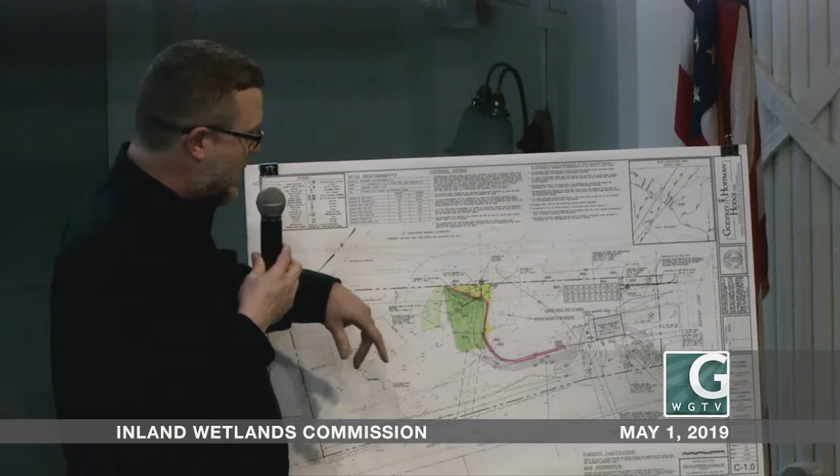So this cleans the water extremely well, captures and contains any sediment or oil within it, prior to any of that water departing our site. From that system, it's going to go into an underground containment system, and then out through the existing storm sewer in East Center Street.

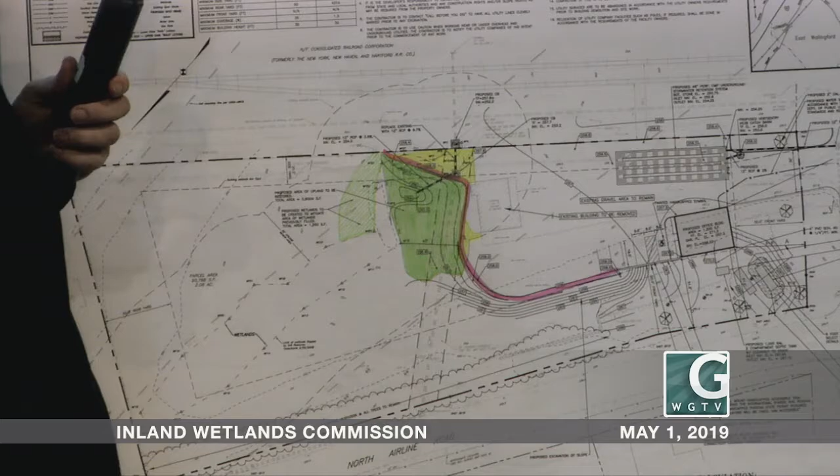So as far as water from our proposed activity that may be collecting sediment or oils, those are being contained and dealt with far away from the wetlands, more than 200 feet away, or 150 feet away from the wetlands. We felt that that would be a better situation if we flow it away from where the wetlands are.

So this pink line designated on my plan here is essentially a berm at the edge of that gravel parking area that will prevent any water, even if there was a lot of water, from flowing up over it and into the wetlands. So we are essentially containing all of this water flowing in that direction, and any water that comes from North Airline Road or overland stays in the existing wetland and in our created wetland area, as well as our upland buffer.

The proposal for the storm drainage and the reconnection of this wetland to the pipe is essentially digging a smaller hole, which is not there now, in that grass area, or the area of straw that you see in the photos we took, making a depression so that the water can get into a pipe and be piped away.

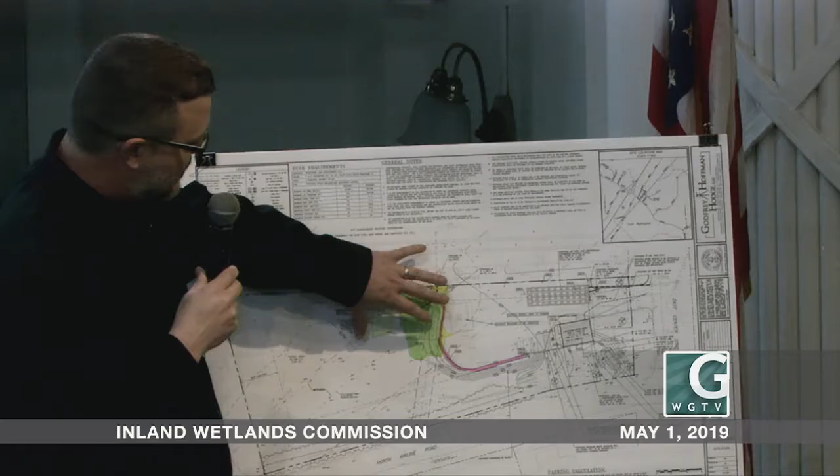But also creating a better situation through plantings and whatnot, which Mr. Lord will get into, so that water which is clean stays clean. The water that comes off North Airline does not go into that wetland, it is piped away. Granted, it goes into the wetland across the street, but it always did. There is no requirement for this owner to clean that water.

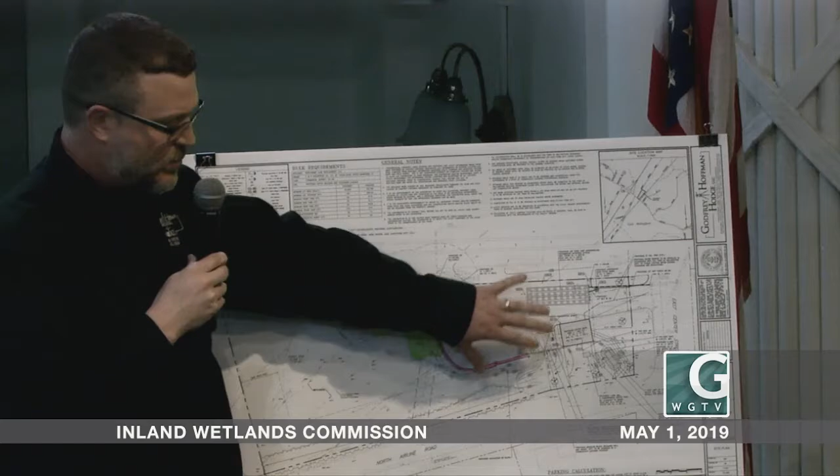We feel that the situation we've created, with a much improved wetland where we create some and a much larger buffer, gives us a 43-foot buffer of new vegetated quality vegetation between the existing wetland and our proposed activity, and that's at the closest point where we would have that activity.

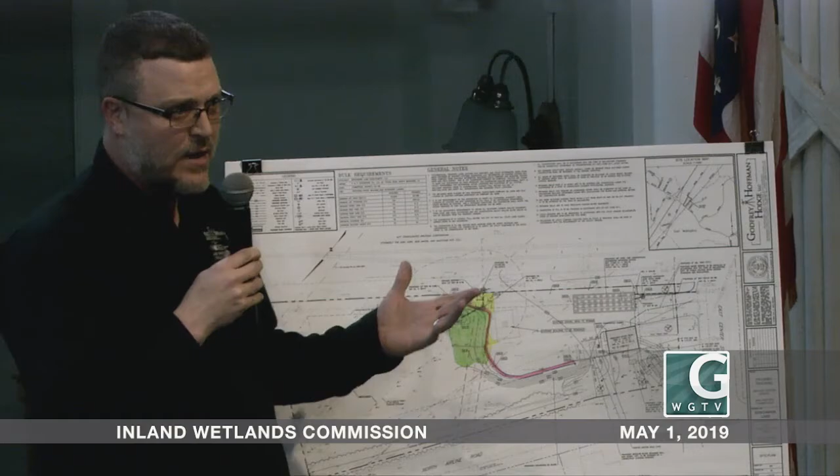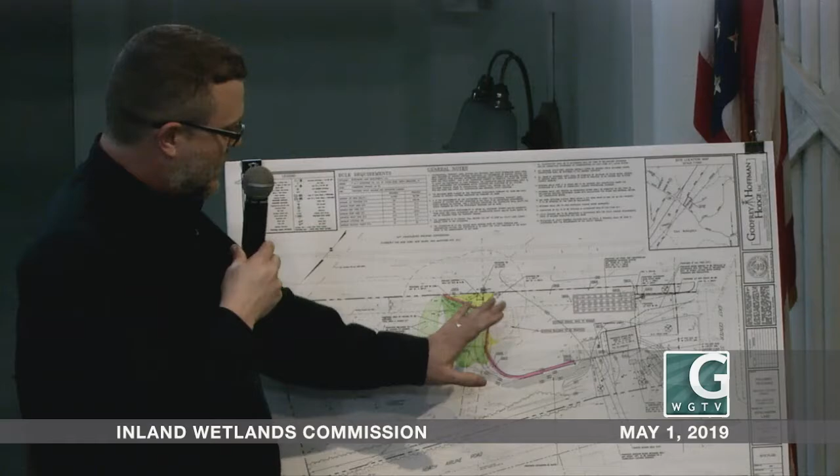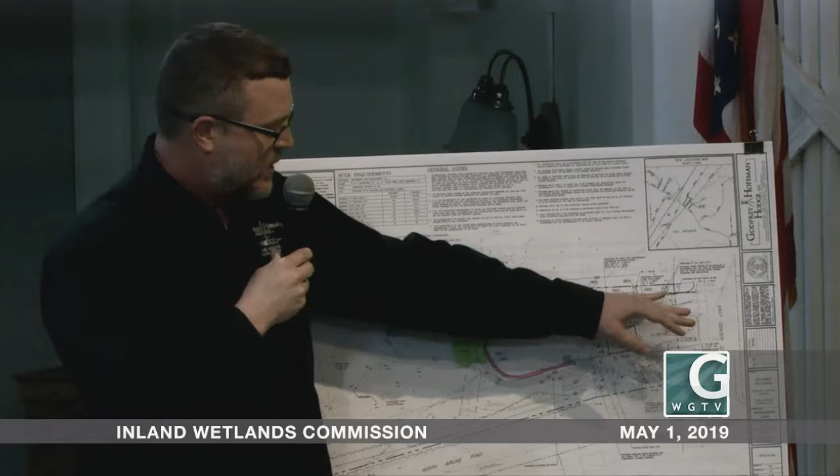That essentially is the plan for the restoration, in large part the same as when we previously proposed it, although we have pulled it substantially away from the wetland from our original proposal. This pulls it up all the way to the back of the existing building, which we propose to remove and construct a new building out front, which would be serviced by city water and a septic system. That essentially is the new proposal. We feel that this is a much better situation than was existing and is currently existing.

Entertain any questions you might have.

You're starving the wetlands. You've just convinced me of that. You've taken the water that was half of the parking lot, that went to the wetlands, and now it's going to East Center Street. You're piping the brook right from Airline Road across and not feeding the wetlands with that water coming off Airline Road. You think you're going to create additional wetlands, but you're not adding any water to that area. I haven't seen anything impressing me that this is feeding the wetlands. This plan is starving the wetlands. When there was an interruption in the pipe, whatever caused it, the water went up into the wetlands, fed the wetlands, and then went back out again.

I don't agree with you. The majority of the water, all of the water you see in that ponding right now, comes from overland. None of it comes from the pipe off of North Airline Road, and why would you want it to? Why would you want the water from North Airline Road in your wetland? Why not? Wetlands can process that water. It's processing it across the street.

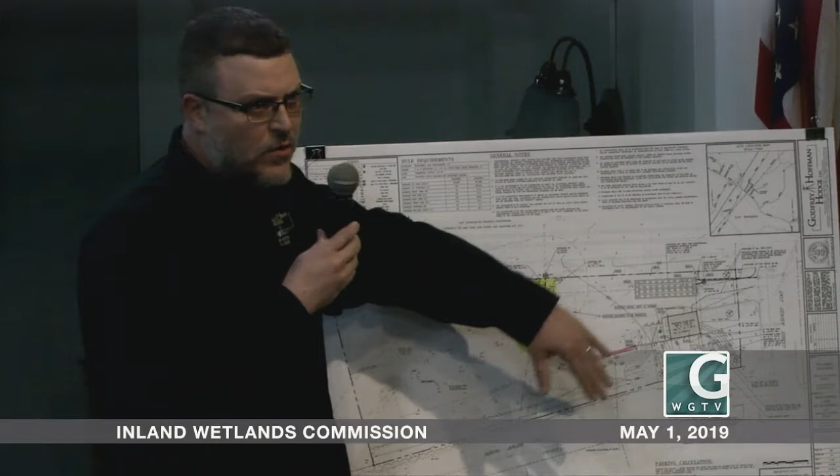So the parking or gravel area is very flat, essentially 2 feet. What's the elevation on the green side? So we're going to go up. I have a 1 foot berm along the edge, and then it drops off also. So in the area along the berm, it goes up 1 foot, comes back down, and then drops all the way down to 254. So it's about a 4 foot depression, a very gradual one down to the inlet of the pipe we propose, which will carry it into the stormwater system. The reason I realigned it and didn't bring it up closer to the property line was to get it more in line with the flow of the actual wetland as it exists, sort of in a north-south direction.

If this is to go further, I'd like to see some type of maintenance program on that water oil separator you want to put in. I don't know if the rest of the commission feels the same way, but if that system is going to be in place, you should have some kind of maintenance program, either yearly or something the engineer would have to design. There is some information in the engineering report on the maintenance of that, and we can certainly provide the commission with more.

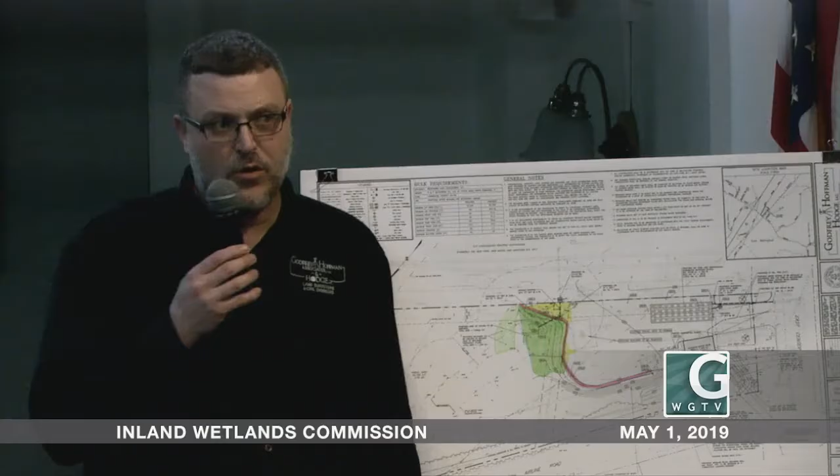Would the access to that field, because of North Airline Road being so steep, where would the access be for the farmer or property owner to mow it? Because it didn't look like an overgrown field, it looks like it's been groomed in past years. It has been groomed in past years, and I don't know whether that is intended to continue or not. We could ask the applicant if he intends to continue mowing it or to allow it to just return to a natural state.

Dave? I'm sorry, no comment at this time. I'm sorry, no comment at this time.

Debbie? Since they haven't complied with our request to remove all that fill yet, I don't see how we can discuss any plans. Fill has been removed, you drove out there yesterday or today, you saw that, and there's pictures that show it's been removed. The only fill that hasn't been removed is where the pipe was open before, which is what Commissioner Kern's been talking about, that's that location.

That's the only location. Dennis, you got a 2 foot elevation change there on the stuff you spread the straw on. There used to be about an 8 foot elevation change there from that mountain of debris. Well, you're heading in the right direction, but you got a few more feet to go.

Based on what elevation? Why would you be basing it on that? It was filled before we went down to where we got to natural soil. Why would you have this 2-foot berm to keep the water back? Why isn't it a gradual slope from the shed that's there now down to the previous grade?

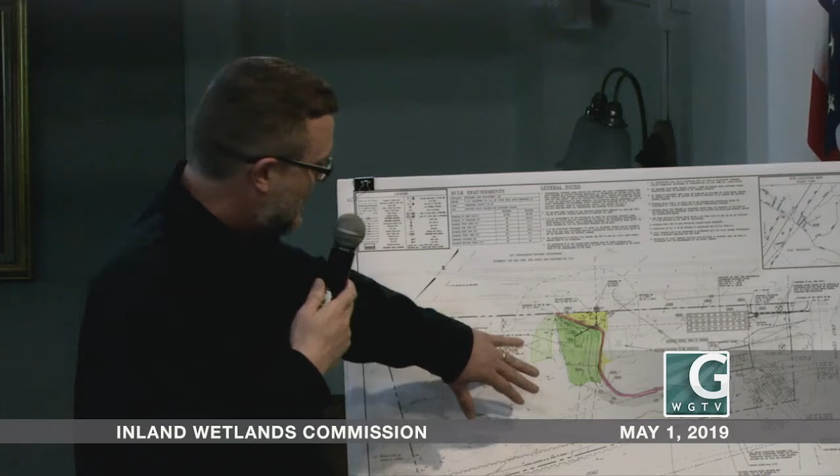Dave, go ahead. Now I do have a question, because this plan, I'm trying to get my head wrapped around it. When we look at the property here, and it's just elevation, whatever it may be, what was the elevation of this particular parcel of land before it was filled?

Commissioner, I can probably give you some insight into that. In 2008, let me just... Well, excuse me, I think it's on your topo map. I think this question is answered on your topo map. Okay.

I think you're down in the 256 category. Right, where did I see the line? 256, 257. And it looks like they're going to give us 254 in their plan. I don't know what their elevation is at their inlet.

My question, just so I get my mind centered: what was it before there was any fill? Was this, and what is it now?

Okay, Commissioner, if I can answer that specifically. David Lord for the applicant. The site was filled at the time I looked at the site in 2008. It had already been filled. It already changed the flow of the wetland that I delineated coming down here, taking the 90-degree bend to the east and then the 90-degree bend to the south. This area, shown on this drawing in shaded color, that's the construction debris that was there in 2008.

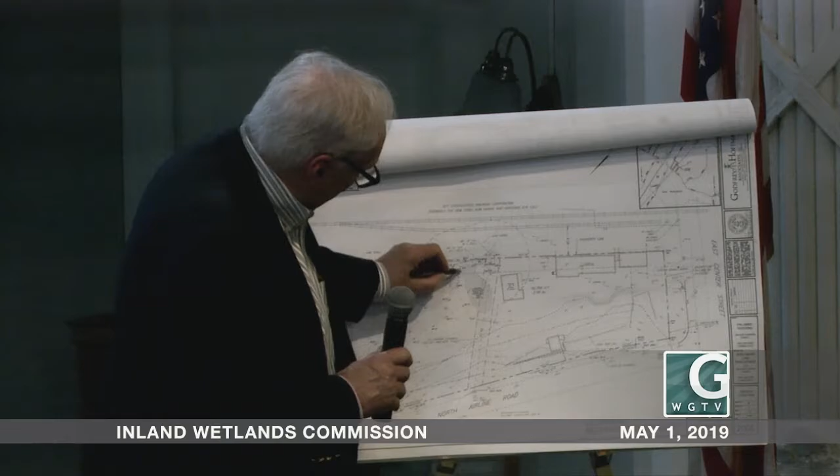The area between my wetland flags and the debris pile was elevated at that point in time. That's why the wetland changed along here, didn't extend all the way to the debris pile, because this area was also filled, likely at the time this redirection of surface flow was done. So there's an area here that was filled at the time I looked at it in 2008.

Then that's what the elevation was. Now, what is the elevation of the property today? What's the elevation of this? Now, of this, because right now we're claiming that we did this remediation. So my very simple question is, what was it before and what is it now?

So you've answered the before portion, and what is it now? The elevation of that area, of that parcel of land, is about 257. And what is it? It's about 257, so with our proposed plan, some of that area is at the grade we propose it to be, and then there is a small area that we propose to grade down further. So you're saying 257 now, and you're saying it was 254 before?

No, prior to... the wetland in that area, this property here, right? It was about 6 feet higher than it is now, before, because there was a big mound of debris. And that mound was taller than me. I don't think the debris plays into this. I think you get the wetlands without the debris, and that's...

Well, that's back prior to 2008. I mean, how do we know what the elevation was? Maybe we're getting a little lost here. How do you know what the elevation was with the debris pile? Because we took topo readings. You've got topos on your map. Are these just lines, or are they accurate? The things we topoed are accurate.

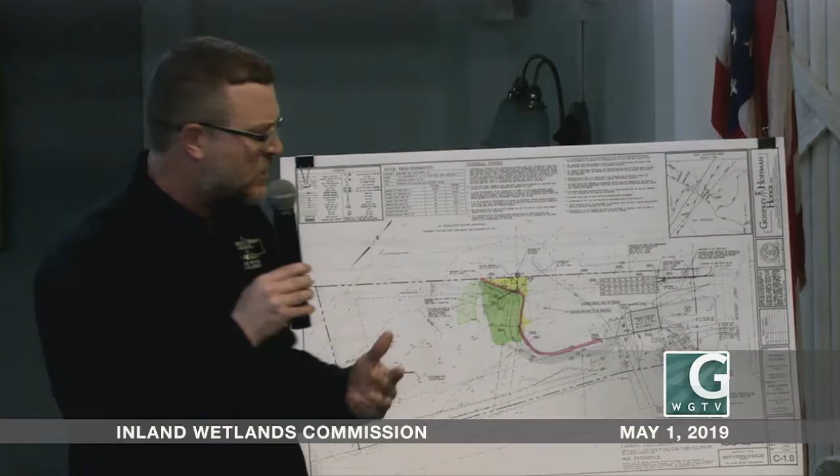So the top of the debris pile was about 261, if my memory serves me, or more. You go from Airline Road: 261, 258, 257, 256, 255, and you're going to create a 254.

All right? Yes. Okay, so that is the kind of area of what the elevation of the wetlands is. Now, you're going to come back with your new berm at 257, so there's a 3-foot slope in a relatively short distance, and you're going to be up where the pipe is going underneath, connecting to the railroad at 258. So you're anywhere from 3 to 4 feet plus difference between the two elevations per your map. Yes, and that's what we're proposing to do.

We didn't do the fill, though. That's the point that's being lost here. We did the gravel.

You told us to remediate our violation. We didn't do the fill—that's what David Lord is telling you, Mr. Chairman. The fill from 2008, you didn't put that in. That's correct, but there's still fill there that you put in. It's gravel. Oh, now it's gravel. It's covered with topsoil and hay on it, is that what it is? No, what was done as a violation still exists out there with topsoil and hay on it. Your pictures show it. That's beautiful remediation, but it doesn't match the existing. What is the remediation? You told us to take out the gravel.

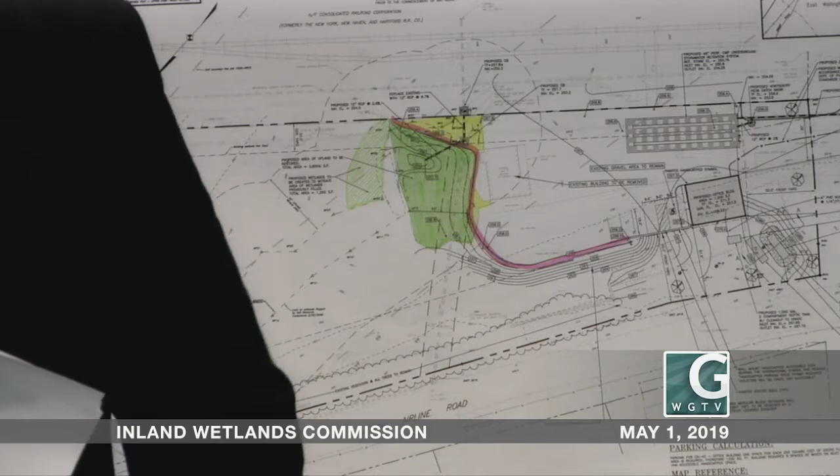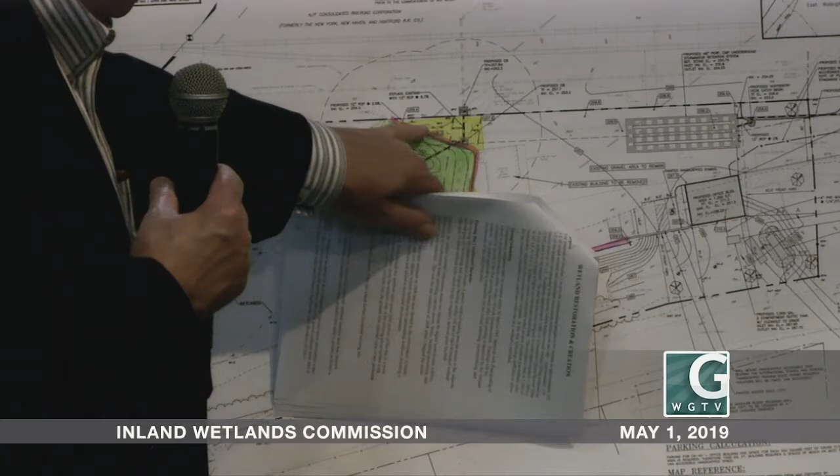Excuse me Dave, flip the previous page back. I think that map can work for you. Sure, that works fine. This area here is where the remediation and restoration of previous wetlands is proposed, same as previous, which reduces the amount of proposed wetland impact remaining down to 347 square feet, in this general area, connecting previously into the railroad property drainage system.

We are at this point proposing to restore 3,800 square feet of upland review area, shown as the dark green shaded area here, to a higher functioning character than what previously existed, both in 2008 and before when it had a gravel surface put on it. So we are significantly improving that area of upland review zone with plantings, seedings, and the establishment of a vegetative barrier between the proposed work area and the upland review area to the wetland.

We have increased the amount of wetland creation that we are proposing. That area is shown in the lighter shade of green. We had a smaller area here in previous iterations of the plan. We now are proposing to create 1,260 square feet of new wetland directly connected to the existing wetland in this portion of the site. That's a mitigation or compensation ratio of approximately 3.7 to 1 - meaning for every square foot of wetland that is to retain the fill on it, we are proposing 3.7 square feet of new wetland of much higher functioning value to the character and functioning of the wetland system in its previous condition.

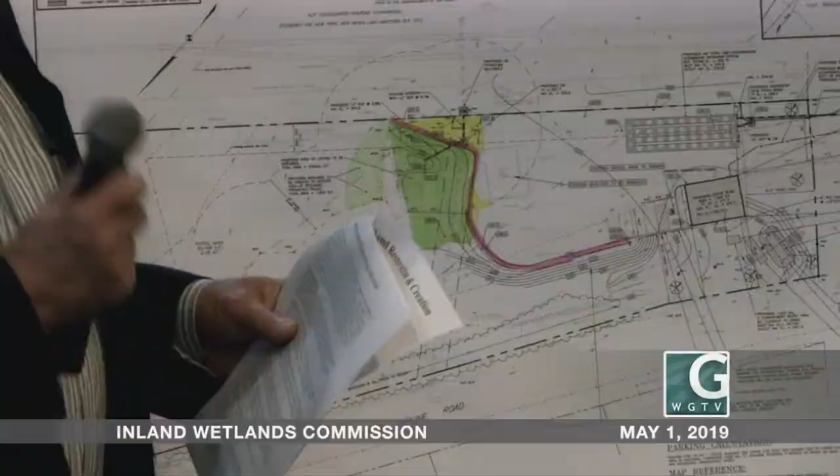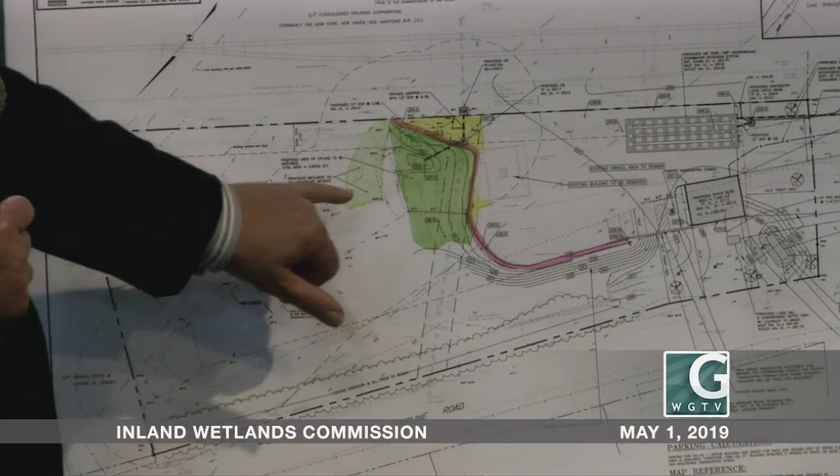That was the elevation existing here on the outside or the inside of the wetland, and that's the elevation we're holding. We are creating a small pool area here at the invert of the proposed pipe, which is at 255, but 254 appears to be, based on soil borings I've conducted in that area, the persistent water table elevation. This area will be fed by localized surface water runoff, conveyance through the wetland system, and the underlying groundwater table conditions.

In general, from a water quality standpoint, the discharge of untreated water is not preferable to the discharge of treated water. This type of structure will cleanse the water as it comes off the site. The discharge of water from the drainage system on North Airline Road into the wetland is not an environmentally beneficial function. It's not something we would propose without some type of catchment, pre-treatment, a man-made structure, or a vegetated zone where Mother Nature could help cleanse the storm water. It's just not something we would normally recommend for handling the stormwater on the site.

On page 2 are those numbers I just mentioned: approximately 900, a little over 900 square feet of new wetland on the site, and a compensation ratio of 3.7 to 1. On page 3, there's a construction sequence.

For the sake of brevity, I won't go into that step by step. If you have questions, feel free to ask. Page 4 begins the revegetation effort within the existing wetland, the restored wetland, the wetland creation area, and the upland review zone area that we are proposing to restore.

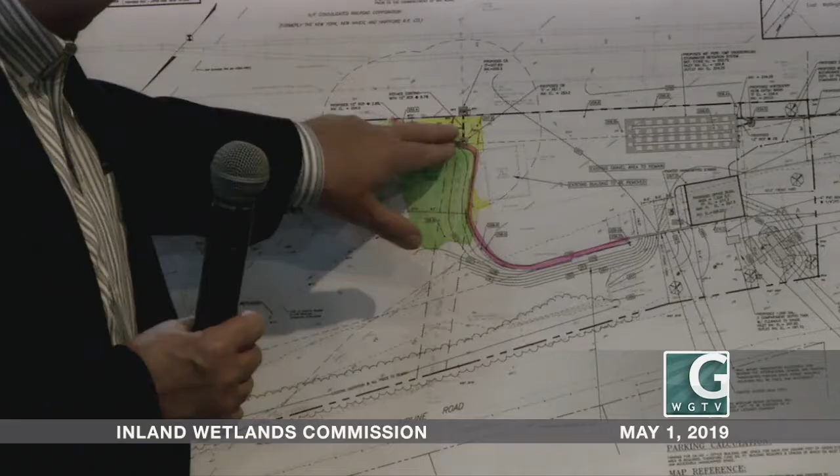It's our best attempt to mitigate and compensate for the small amount of 375 square feet of wetland impact in this area of the site, restoring it to a closer configuration to what it was after the debris pile was removed in 2008. There was a zone of basically flat, higher elevation off of the wetland in the area of flags.

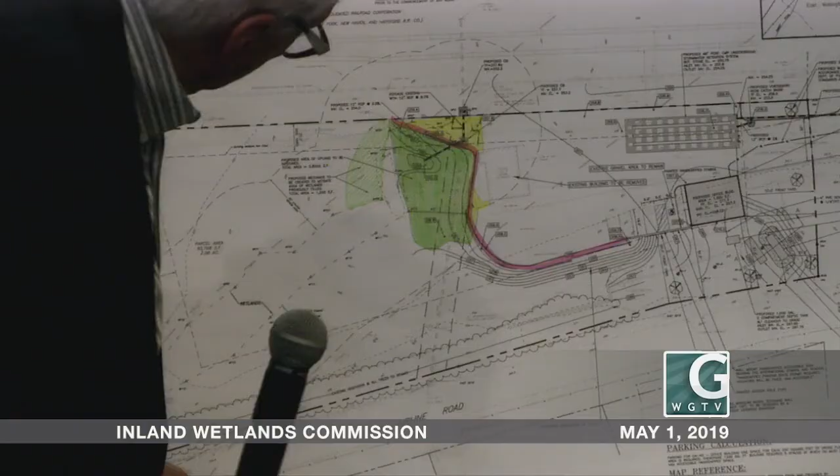There was a step up from the wetland in this area to the upland review zone outside of the wetland before you actually got to the pile of construction debris. There was a surface there at a higher elevation than the wetland, because that's the only way the wetland would have made this kind of turn — there was a higher elevation that deflected the water through that system.

So that's the quick overview of the plan. I'll be happy to try to answer questions that the commission may have.

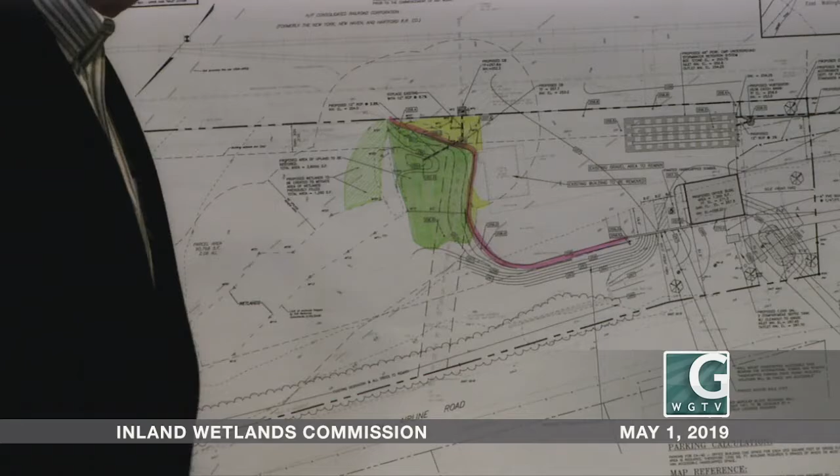I have one. You are creating a new elevation with the pink line. Yes. And the distance between the pink line and the wetland is 43 feet, is that correct? At this point here it's much greater, but at that point it's 43 feet. Yes. And the elevation difference, if you're adding 3 feet, you're going to have a 5 to 6 foot drop

from that point in 43 feet or less. You're going from elevation to — the highest elevation I see, correct me if I'm wrong, Marcus — is 259, and we're going down to 255. That's 4 feet. But you're doing it, you're adding fill back into the upland review area.

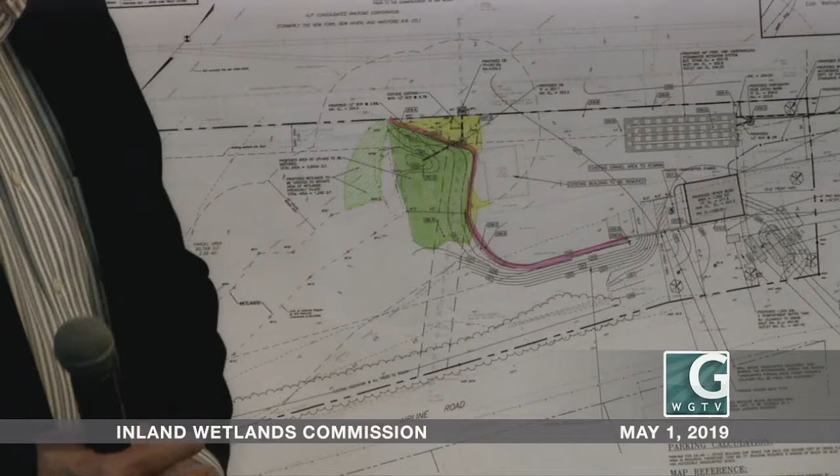But we're bringing the grade down. But you've got this high elevation here. This elevation is set, it's in existence today. Oh no, not where the pink line is, I don't believe. Your elevation stops behind the building. You're at 256, and you're going to bring it up to 259 right there.

Yes. So you're going to create a very sharp berm? You're going to have a retaining wall or something there? You're going to bring up 3 feet? No, we're essentially creating a berm, a 1 foot high by 4 foot wide berm. It goes up 2 to 1, it goes down 2 to 1, and it's essentially just to deflect water away. We're going to put a row of plantings with arborvitaes along the base of it.

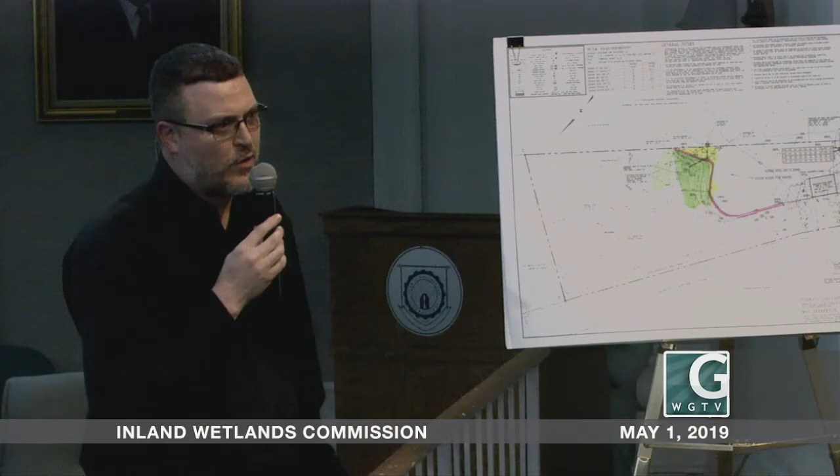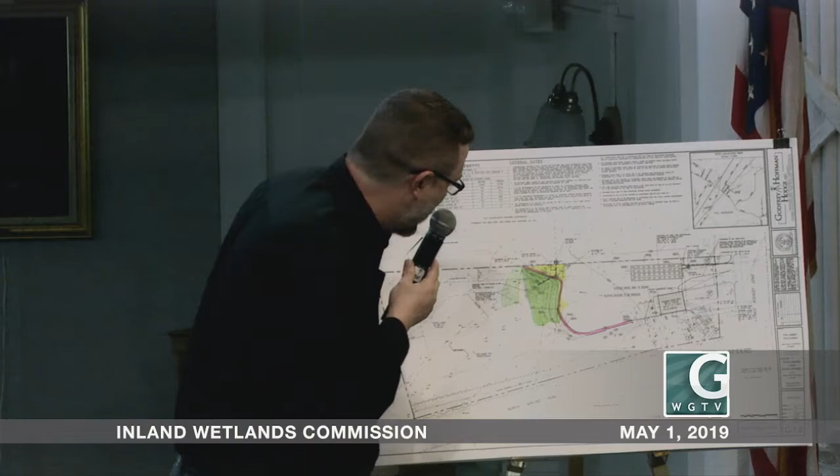So the parking lot — what's the elevation of the parking lot? In that very corner it is 258. In the front corner near the building it is 257. And then on the other side of the berm it's 256. The berm goes up and then goes down from there.

Why don't we have 50 feet of upland review area there instead of 43? Right at that one spot, for the turning movement of the vehicles that the applicant wishes to use there.

I have a plan. So the way I see it, you got a pretty rapid decrease in slope in that area. I would call that a very gentle slope. On the north side of that berm, the elevation we propose is 258. It goes down to 255, which is 3 feet in 43 feet. That is not a steep slope. That is a fairly gentle slope.

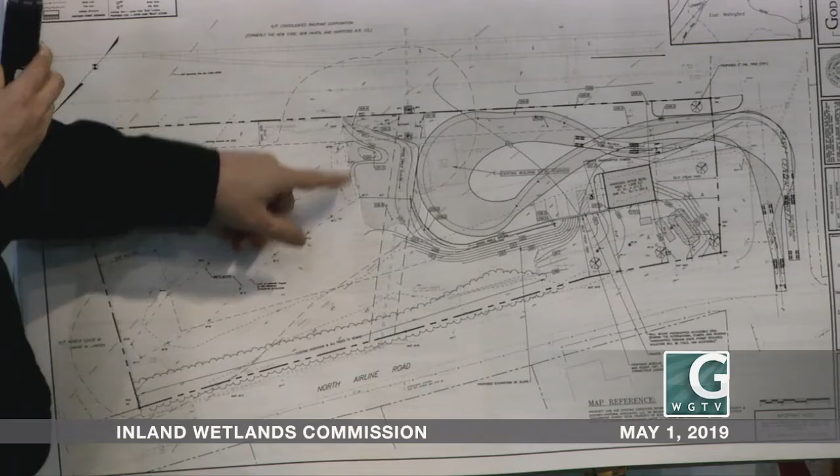The reason for the shape of this curve and whatnot was to be able to turn a truck around without hitting any cars parked in the parking area, and to allow for a more gentle slope for the swale on the other side of the berm. Commissioners, any other questions at the moment?

Nick? The only one I'll ask is about the snow shelf — the created wetlands you're going to build — where are you going to put your snow? I know you need a big area for your trucks to come in and back in. Where was your plan for the snow shelf? I would put it in this north area here, where the proposed building would be, into that bank — in the corner. That's the only safe place to put it, or remove it.

Ally? Overall, I like the plan. I realize there may be some issues with the amount of wetland or upland review area, like you said. But I think there's been a lot of abuse to this wetland over the years, by many more owners than this one and the last one and the one before. So overall, I think the planting plan and the restoration plan are nice.